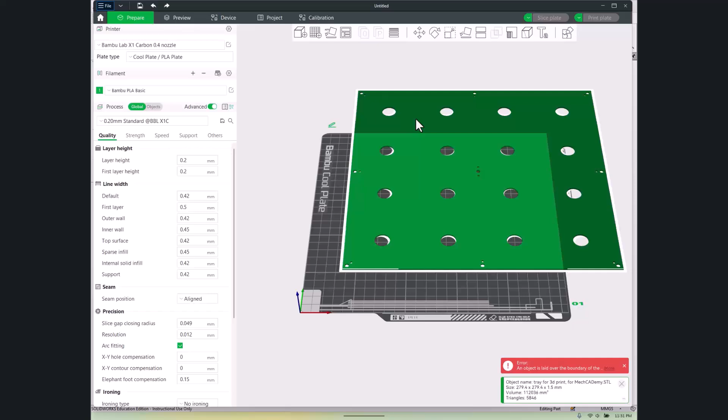This tutorial is related to 3D printing and also CAD modeling, but the purpose of this tutorial is not actually 3D printing. However, I want to use a slicer to show the issue and then how I want to solve it. I have a big model that you can see here. It's a plate, a very simple plate with several holes in it, and this is the base plate that I have for my slicer. My printer is Bambu Lab X1 Carbon, and the bed size is 256 cubic millimeters.

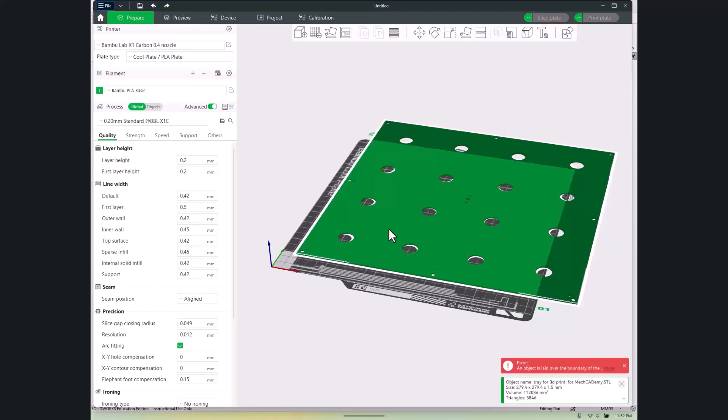I have imported the STL file of the model into the slicer for Bambu Lab. It's called Bambu Studio, and you can see that the model is bigger than the bed plate. What can we do to fix this issue?

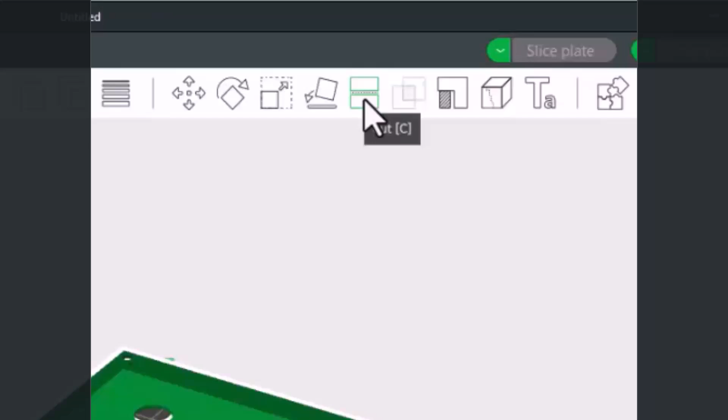Bambu Lab slicer has already some tools we can use. For example, one of them is this tool called Cut. We can cut this into different sections. We can definitely use this. However, I want to actually focus on the tools that we have in SolidWorks to do this.

What I want to do is slice or split this model into smaller pieces and then one by one bring them into my slicer and create the G-code for each one of them, then print each one separately. So let's just go to SolidWorks.

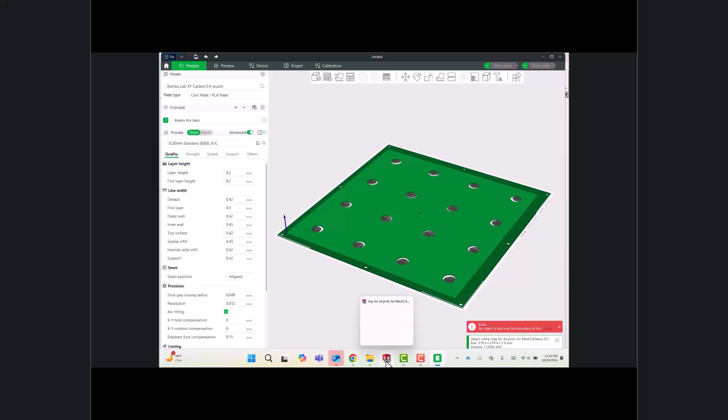This is our model in SolidWorks. You have the plate here. I want to cut this into several pieces.

So now I'm just going to do some measurements. I have already created a shortcut key for measurement. When I hit Q, I can measure the lengths. If I click on this one, it says 279.4 millimeters, so it cannot fit into the bed plate in my printer. If you also do the measurement on this edge, you see 279.4.

So the best way to slice this into smaller pieces is to actually make it into 4 divisions. I can just slice or split this all at the center. However, I have a lot of holes at the center, and I don't want the slice to pass through the holes.

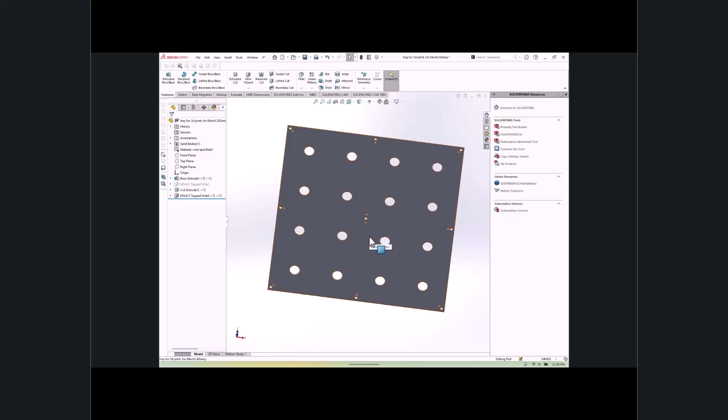Let's just make some sketch. Click on the surface, then Control-8 to make it normal to the screen, and then make some lines. I want to use 2 lines as a slicer.

So I want to use the first line to go from the top edge here and end at the bottom edge here, and then make another line from here to here. I want to add some dimensions just to make sure they are in the right spot.

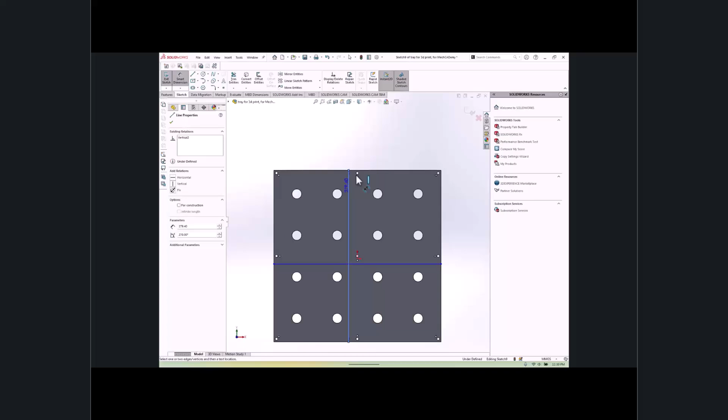They are away from the holes. So I want to add the distance between this line and the center of this hole equal to 8.5, and the distance between this line and this center hole here to be 12.75. I'm done with the sketch.

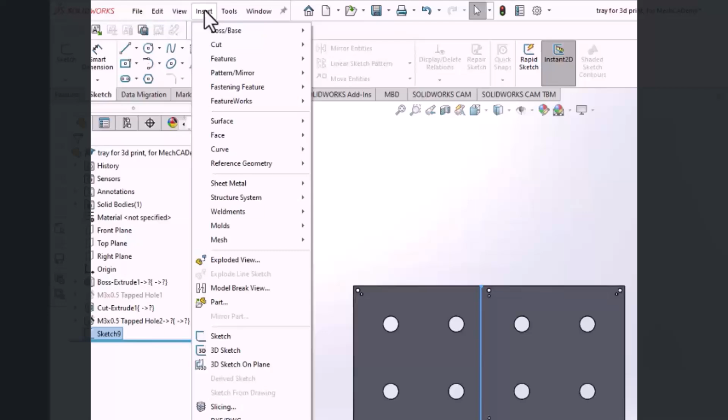So now I want to use the split command. Here I can just click on this sketch, and as you can see, it is already highlighted. One way to do the split command is to go from Insert, then Features, and there is a split command. That's one way. Another way is to use this bar here.

I want to use this bar because you can actually learn a new method and use it for any command. When you click on this drop-down menu, it gives you several options. One of them is commands. If you click on commands and write 'split', it brings you the split command and you can select it. Now you can see you have a split command and there is a trim tool, which is sketch 9.

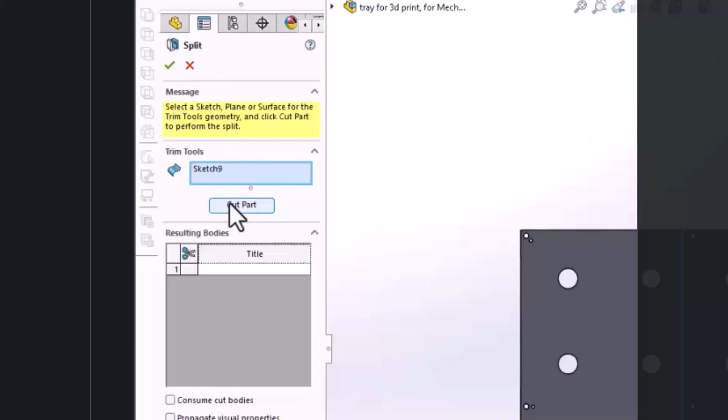Okay, take a look. If I hit cut part, it will do the cutting for me. Now you can see that it has created 4 sections that are separated.

I can click on this auto assign titles, and this will create new titles for each one of them. If I click on the check mark, it will create 4 separate SolidWorks part files, and it will automatically save all of them in my work folder.

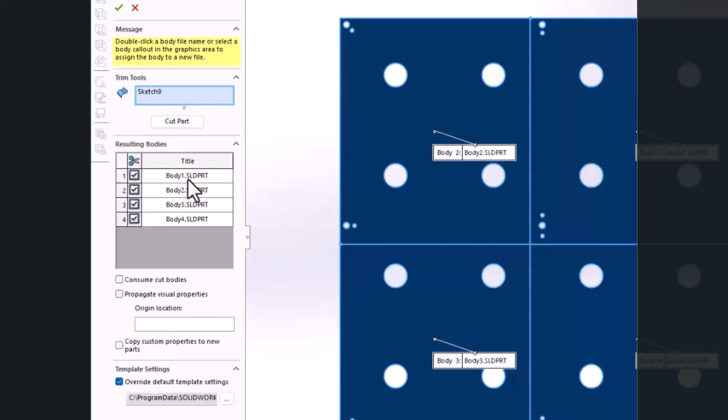If you don't like this and you want to name it yourself, you can just double click on each one of them and then name it.

Now you have a new window. In this new window, you can name it as top right. Okay, this just created the top right. And now if I click on this check mark, it will create all those parts for me.

Now there's a split command. You can also right click on it and edit it, use a different sketch, whatever you want to do.

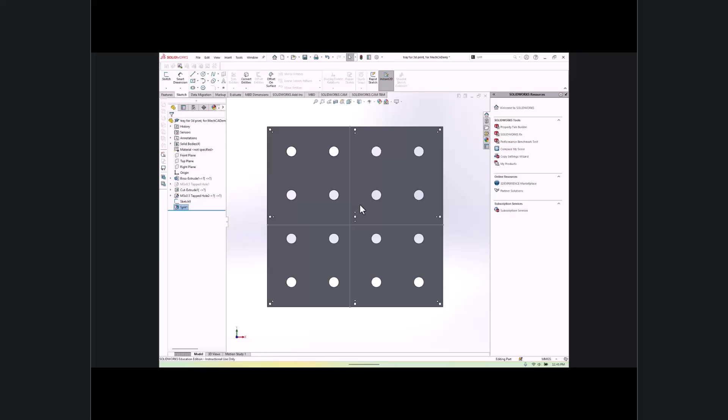To double check that we have all the files, we can go to the working folder, and now you can see that there are 4 parts: top right, and then I didn't change the name of the other 3.

Please note that slicing a large model into smaller pieces for 3D printing is one of the applications of a split command. Let's go through some other applications for this useful command.

A split command can be used to separate different parts of a model for multi-material printing or manufacturing. For example, if a part needs different material for specific sections, splitting the model allows each section to be made from the desired material. Another application of a split command is creating mold tooling.

When designing molds, the split command can divide a model into core and cavity components. It helps in creating proper mold halves for injection molding or other casting processes.

The next application of this useful command is slicing a model for finite element analysis. You can split complex geometries into simpler, manageable sections to apply different materials, different mesh, and different boundary conditions in your FEA analysis. It can also make meshing easier and more efficient.

A split command can also be used for geometry simplification that you might need again for your FEA analysis.